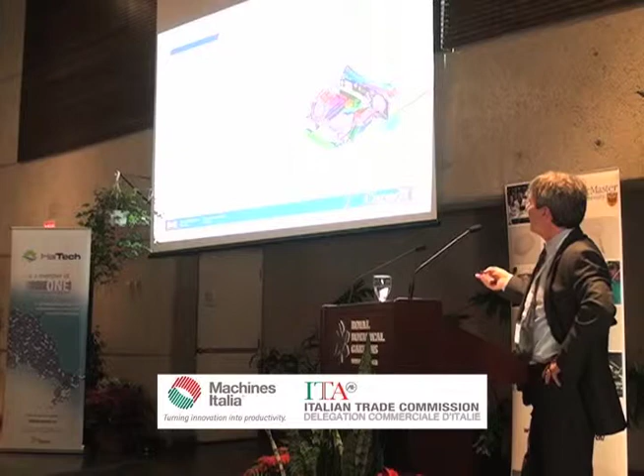Okay, so some of the trends. Fuel economy, something that surprises people a great deal - this is data from North America. Over a 20-year span, fuel economy barely changed. We had the oil problems earlier, but it really didn't change. The transportation sector, however, accounts for 36% of energy use, 24% of GHG. Huge numbers, that's just transportation. And a majority from petroleum fuels.

Another thing, vehicle weight actually over that 20-year period increased by 10%. Why did it increase by 10%? It's because we want cars that accelerate faster. We want cars that have more space. We want cars that are more technologically enabled, infotainment, etc. So in the fallback of this up to 2010, this is fairly stable. We're working diligently to lightweight a car, and everybody is familiar with that. The challenge, all it means now, is that the challenge moving ahead is even greater because we still have to get the car lighter eventually.

Another thing is what are we up against? The CAFE regulation, and the equivalent for Canada, is just in terms of GHGs, but we have to hit a 54.5 mile per gallon target. And how do we get there? We have to get there through lightweighting materials, powertrain efficiency. There's a number of different ways to do that, but materials is one of them.

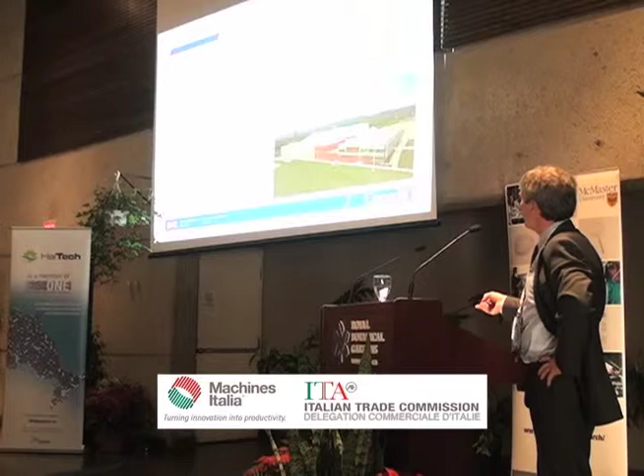We have to make powertrains last, be able to survive higher pressures, higher temperatures, and to do that kind of thing, you could look in the direction of ceramics, as we learned earlier today, but you can also look at opportunities with metals, and that's what we do most at CanmetMATERIALS.

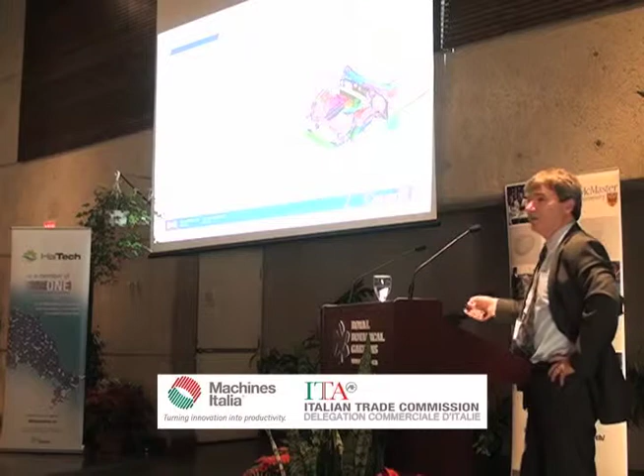The third way to look at this is that 70% of the energy from fuel, when you burn it, goes right out through the radiator and out the exhaust. So 70% of the energy is lost. There's a great opportunity to both recover and convert that energy in one way or another. I'm going to talk a little bit about an opportunity for that, for instance.

Okay, so what are we trying to do? We're trying to make industry competitive. We want to get the environmental benefits while we're doing it.

The problem is that whenever we try to lightweight, we have to do that without affecting vehicle safety. We still have to pass crash tests and we still want people to know that they're safe. A lot of the things we work on improve safety by actually reducing the intrusion distance in a crash, so it doesn't get near you under the same circumstances as the vehicle before. There's a few other important things here.

Reliance on fossil fuels - if we're using less, we're better off. Reduce GHGs, everybody knows that, it's everywhere. Clean and renewable energy - we're working on materials that enable you to get electric vehicles working, which means you can get clean electricity.

Key technical challenges: really manufacturing, strength of materials, durability of materials, and getting materials to do more things within the vehicle, not just the traditional materials.

Who are we working with? Basically raw material suppliers, the supply chain, vehicle assemblers. What are they looking for? Performance knowledge - they need that simply to reduce the risks associated with introducing new materials. You have to understand how new and novel materials behave so you can integrate them into your products. One of the things we don't do is make products. What we do is hopefully enable the parts suppliers and assembly people to be able to make the products and vehicles we talked about today.

Who do we work with? One of the mechanisms we identified earlier was that there are some key universities we have collaborative research agreements with. McMaster was the first university for us to join, and because of that long-standing relationship we entered into that agreement, and with the transition to the Hamilton area, it made sense for us to work together.

Here's 7 projects. Again, we're 100 people with a small investment in a lab that's very focused on metals research. What we realized is that without collaboration, we weren't going to achieve the things we wanted to achieve. So Automotive Partnership Canada, one of the funding organizations, $145 million spent. There's 7 projects we're involved in, and it's very diverse.

There's magnesium here, aluminum and high-strength steels here, aluminum casting with McMaster - Sumanth Shankar is one of the partners here. These are looking at extruded front rails, aluminum alloys, and this is a project on lithium iron phosphate - we heard from Gianluigi earlier that there are battery materials they're looking at. This is a material that goes into the electrodes of lithium-ion cells, and so we're involved in that.

The reason we're involved in all these projects is that we have some expertise, either researchers or equipment that can be used very effectively, which they don't have, so we're an integral part in delivering that. We're a small group of 100 people - 75 technical, 37 PhDs - working with a broad base of universities and people to enable them to achieve what they want to do.

So now into a bit more detail of what we do. We saw three things that were important: vehicle lightweighting - by 2025, and I was involved in 2011 in a workshop put on by the US DOE. They had 350 people from industry, academia, and federal labs in both Canada and the United States, with probably a few international participants as well. Some of the things they recognized is that to achieve the fuel economy goals, these are the kinds of targets we'll have to take.

Take the body structure and reduce the weight by 50% by 2025. We don't have a lot of time to do that, and if you think about how we even integrate these technologies into vehicles when models only change every so many years, it's very hard to get these kinds of targets. But this is what they felt was a stretch goal - possible, but also necessary to get to where we wanted to go.

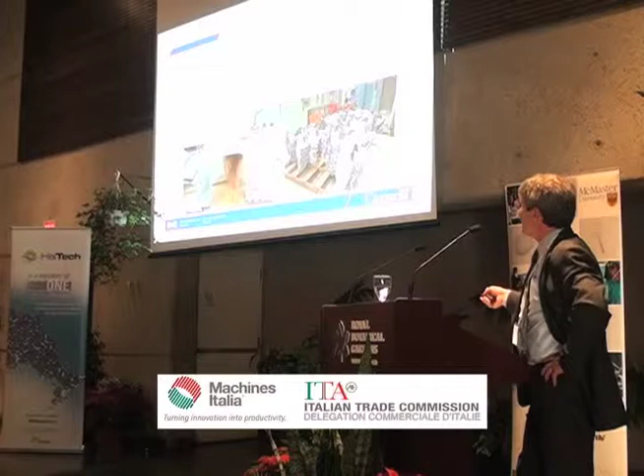Some of the stuff we're working on: we're casting in a high-pressure die caster a magnesium alloy, AM50 or AM60. This magnesium structure sits right beside the wheel, and it holds the rails, the crush rails. When you get into a crash, the crush rails are held by this structure, and the wheel sits right beside it, and the shock absorber, which allows your car to go up and down, sits right in here.

One of the things that we have is a 1,200-ton press. I'm not spending a lot of time on all the facilities because it's best to just come and see them, but we have a 1,200-ton high-pressure die casting press that allows us to make these kinds of parts.

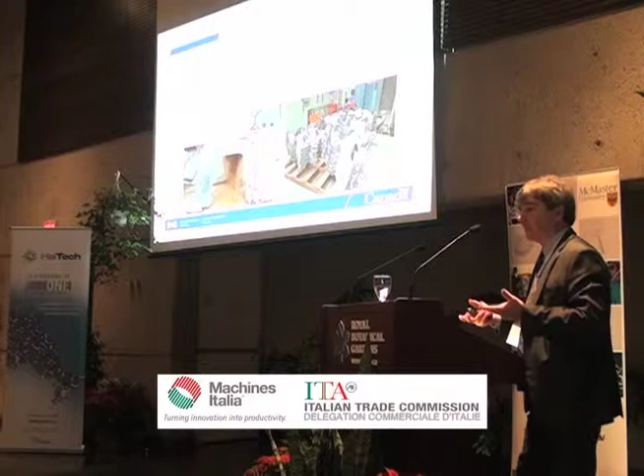We made 400 parts in a single run that fed a three-country collaboration between the United States, Canada, and China, because they have great interest in magnesium, since they make most of the magnesium globally. So we have a three-country collaboration where each country takes the parts we've manufactured on our press and uses them for their studies. One might be doing strength, one durability, one corrosion, etc. That type of collaboration allows us to pull a team together.

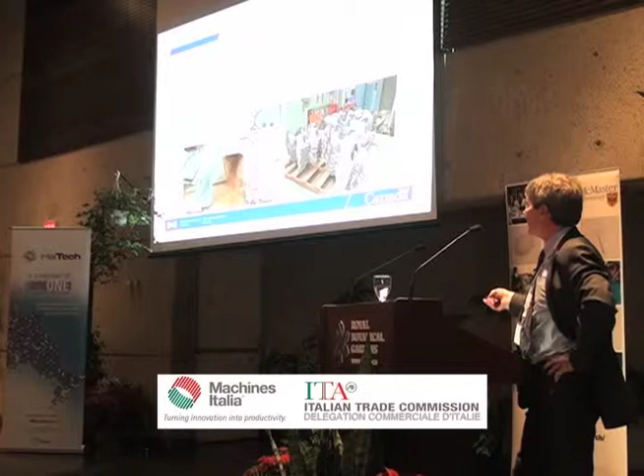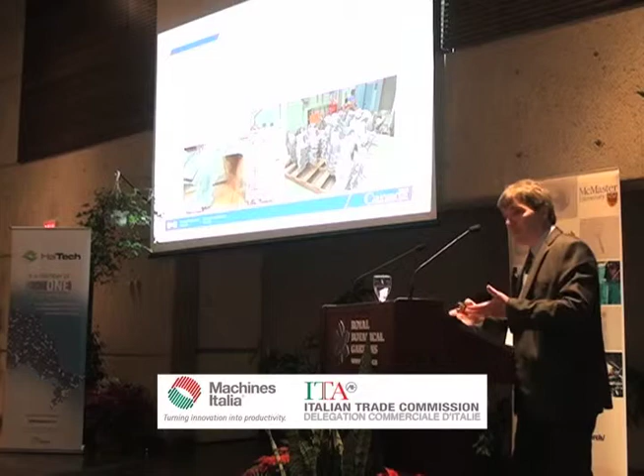This is about a $3 to $4 million a year activity. Our investment is about $200,000 to generate the kind of parts that go into it. It's very important to have the parts for this kind of activity, so putting that amount of investment into the equipment we have is critical to the success of that kind of research.

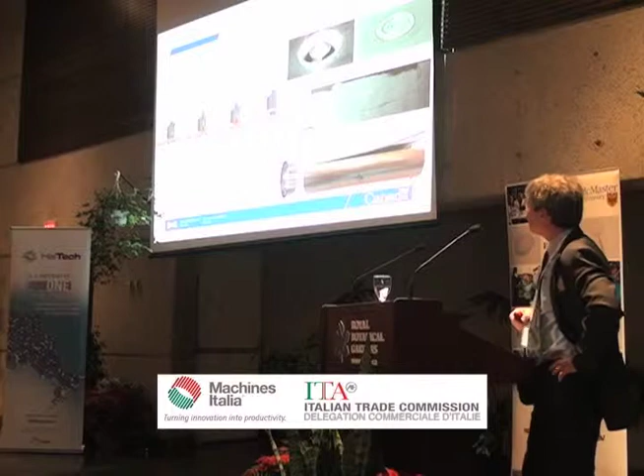Carrying on with lightweighting, I mentioned the multi-material vehicle. Structures traditionally have been made out of steel—mild steels, high-strength low-alloy steels. There's increasing pressure to make vehicles out of mild steels, high-strength steels, but also advanced high-strength steels, extremely high-strength steels. These steels put on the same vehicle pose a challenge in that you have to be able to join these high-strength steels to steel.

There are other opportunities, like the magnesium part I showed you, which is also made in aluminum—we actually have that part in production in vehicles out of aluminum. The problem that comes up is how do I join them? If I had to join aluminum or magnesium, a casting to a sheet metal of different materials, sometimes it's within the alloy itself—aluminum alloy to another aluminum alloy—and I can't actually weld them using traditional methods.

There's a method we're looking at called friction stir spot welding. We're very interested in it because the method basically takes two pieces of metal, overlaps them together. In a traditional sense, we would see spot welders used.

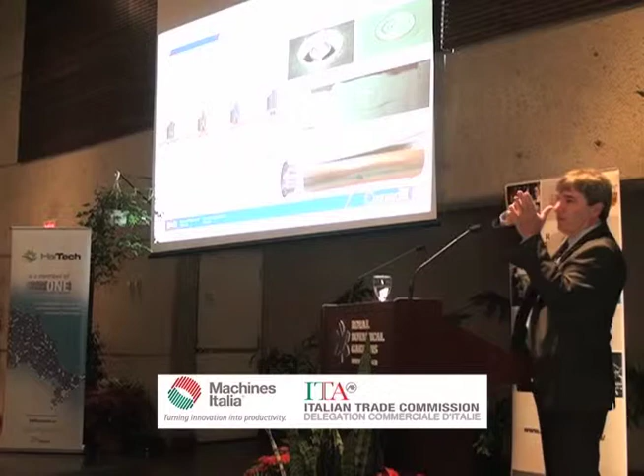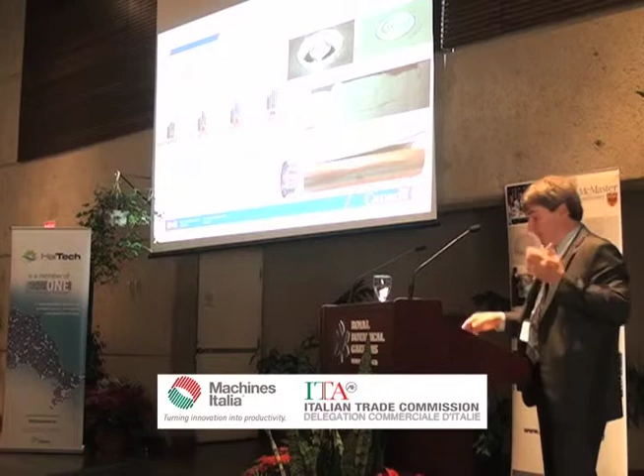In automotive assembly, we see spot welders—it's always exciting because it spits out metal, it's hot, and it's interesting seeing a car actually being made in an assembly line. The idea here is that you can take the robots and infrastructure you already have; you don't have to buy new equipment. You use that equipment, put a new head on, and take a tool much like a drill bit, drive it into the metal, but you don't melt it. If you don't melt that metal, you can create a joint.

This is a special approach, because if I took a traditional friction stir spot welder, I would be left with a drill hole, since a drill went in there and mixed those two metals together. What they do instead is drill, then the metal pushes back up on the edges, and they drive that metal back in to get a flat surface.

A sample or joint with a big hole in it is likely going to be much weaker and likely to fall apart by fatigue during the service life of the vehicle. So we're studying how to join things like aluminum to steel, high-strength steel, magnesium to aluminum, aluminum sheet metal to aluminum castings, those kinds of things. This is a cross-section of what that joint looks like—normally you'd see a large hole right here because of the drill bit itself.

So we're studying that. This is a collaboration we have with Magna Corporation, and the University of Waterloo has one of these heads, which allows us to do some studying. In terms of lightweighting, everybody realizes you can apply aluminum and magnesium alloys to lightweighting, but we're also focusing a great deal on advanced high-strength steels.

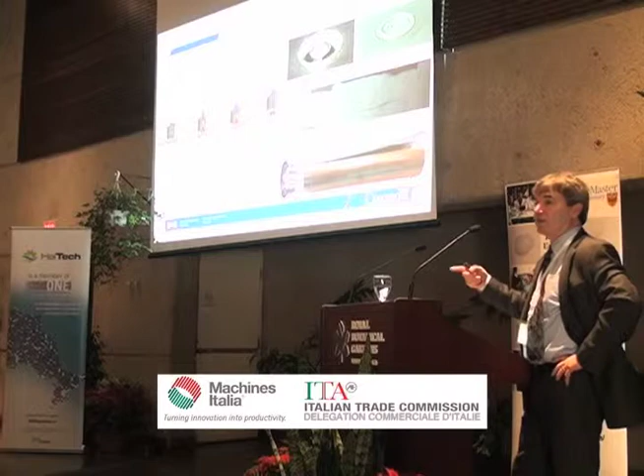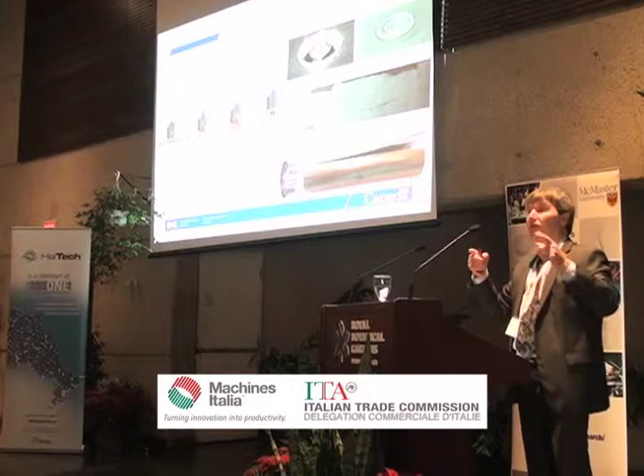So very high-strength steels. One of the things that goes with high-strength steels is that if I take a part like a frame, a B-pillar or an A-pillar, that's what protects your head in a vehicle. A traditional manufacturing method would take a tube and hydroform it into a shape, which protects you in rollover or crash situations. What we're doing here is looking at high-strength steel and expanding it out in a hydroforming press.

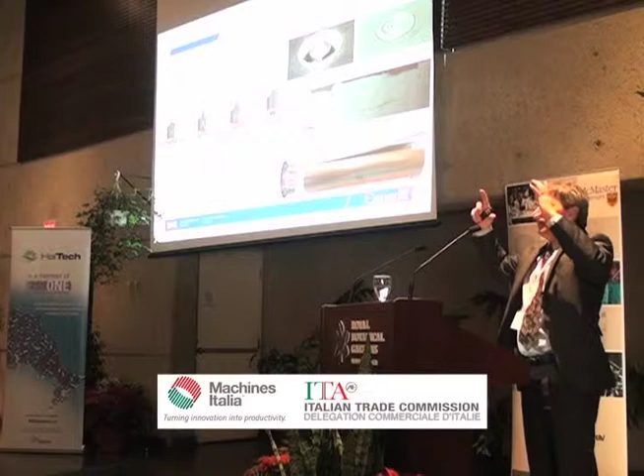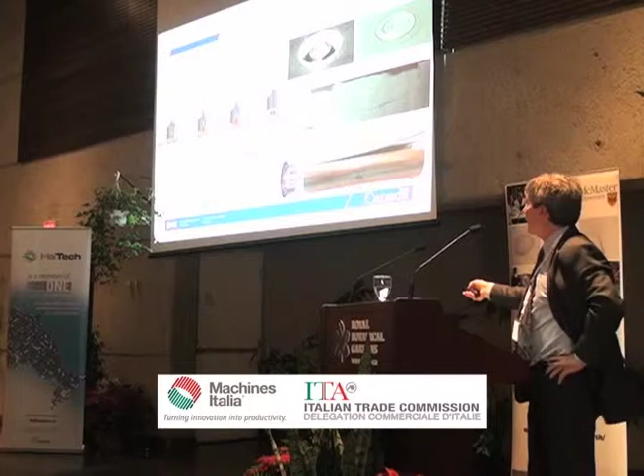Then when you relieve the pressure, it shrinks back, and predicting the shape of that part gets extremely difficult. So we're working right now with Vari-Form, a hydroforming company that makes those kinds of parts, and we're looking at the springback of these steel tubes that get bent into shapes that protect us in a car.

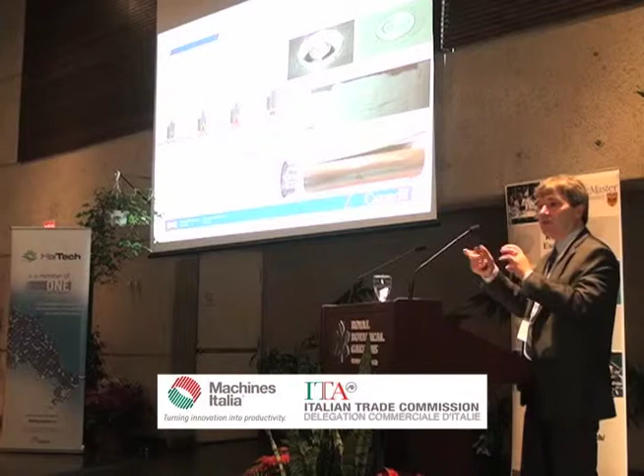What we realized early is there are problems with making a tube out of flat sheet and rolling it up - you get residual stress. That residual stress makes it extremely hard to predict what happens when you hydroform. So we're doing experiments, but also computation, to predict how to get the right shape at the end. And that's important.

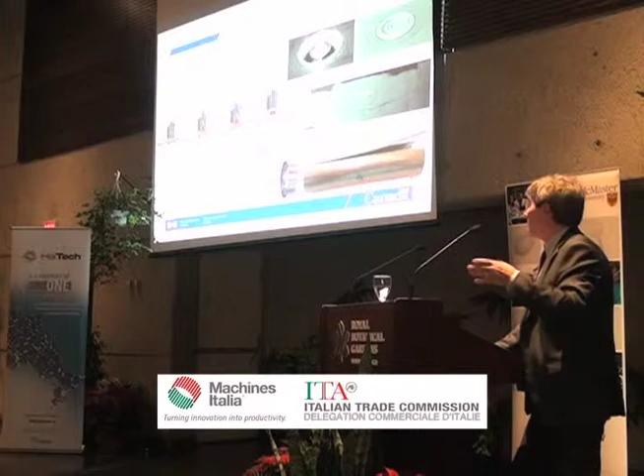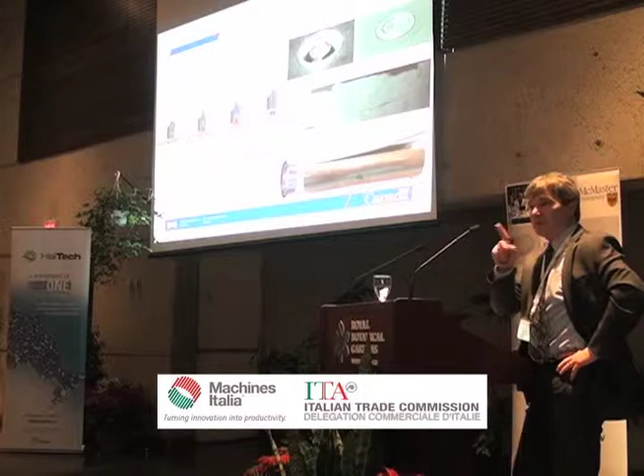A major thing that causes a part not to get deployed into production is the cost of the tooling to develop it - not only production tooling, but prototype tooling. If we can get a good idea of how springback behaves, we can cut that back significantly, to the point where we might have one tool that hits the shape and then go right into a production scenario. That's an important contribution.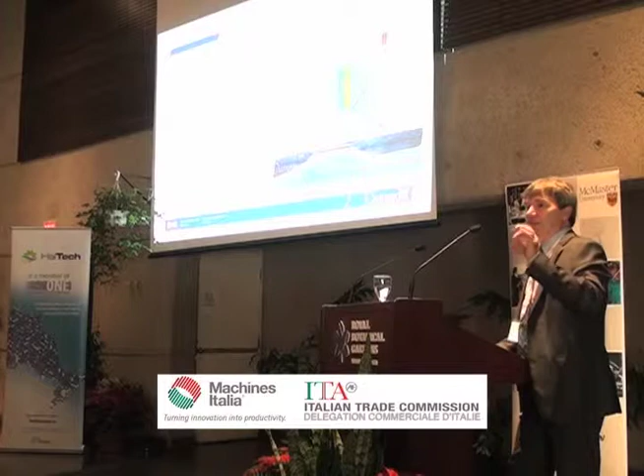What GM found and patented was a method for that spot welding. The problem wasn't that they couldn't get the process to work - they got the patent on the process. The problem was they didn't know how strong the joint was in the spot weld, so they couldn't predict exactly how it was going to behave when designing a vehicle that might compete with, say, the Ford F-150. The Ford F-150 truck is now an all-aluminum vehicle, and GM is looking at the opportunity to do that and deploy it in other vehicles as well.

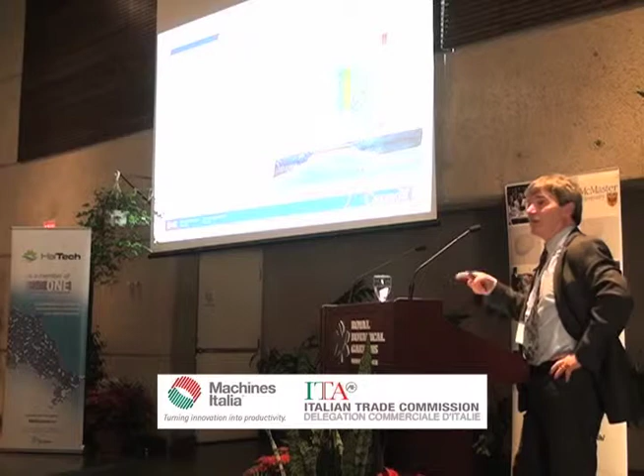The point here is that Canmet developed a testing technique, now an ASTM standard, that allows you to predict the actual behavior of that nugget. Being able to do that allows GM to design that next vehicle much more reliably. The interesting thing is, each time they pull, they try different combinations of metals, and we can tell exactly how they're going to behave.

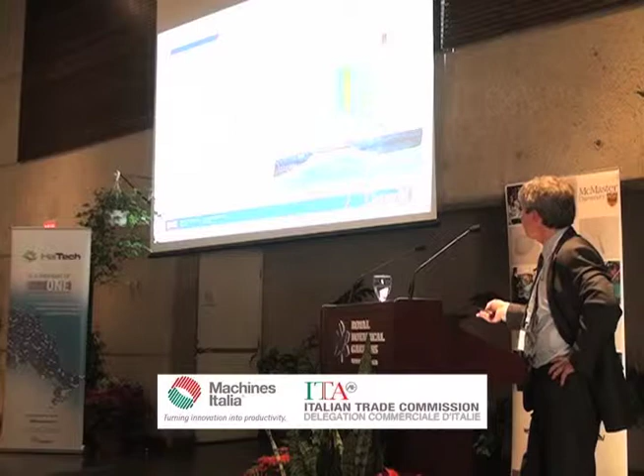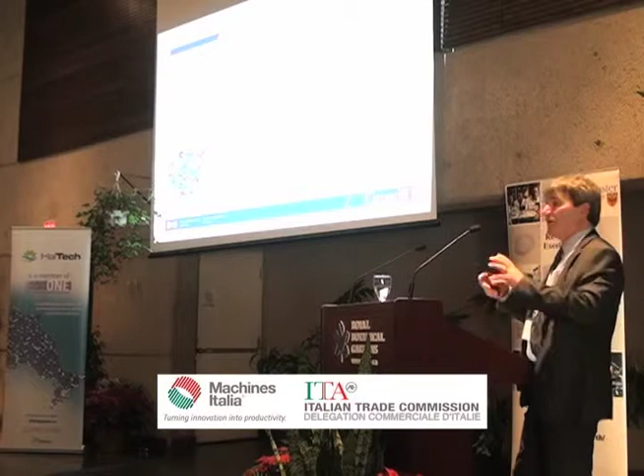Something we also do is computational work. This one was looking at third generation steel, trying to find something extremely strong and tough - ductile and strong makes a very tough material. We know through our work with the U.S. Department of Energy that they have a massive initiative, spending tens of millions of dollars on this kind of activity.

But we found out through close discussions with them that they had a gap in one area - computationally they weren't addressing what they needed to do computational materials engineering, literally to design those steels. Making every steel at Canmet isn't the most cost-effective way of doing it, so using computational means is a way to do this.

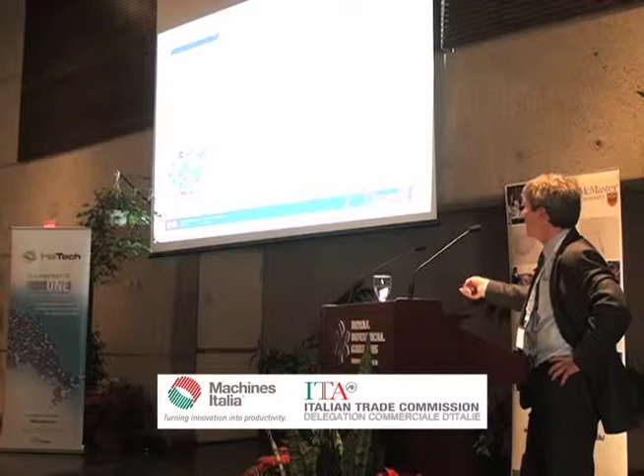So, virtual microstructure - we've seen a number of cases. Gianluigi showed us some stuff on the grain structure in materials. So we've got a typical microstructure here. They're taking the microstructure and developing codes that allow us to do yield curves, how a material plastically deforms, and looking at forming limit curves, all through computation.

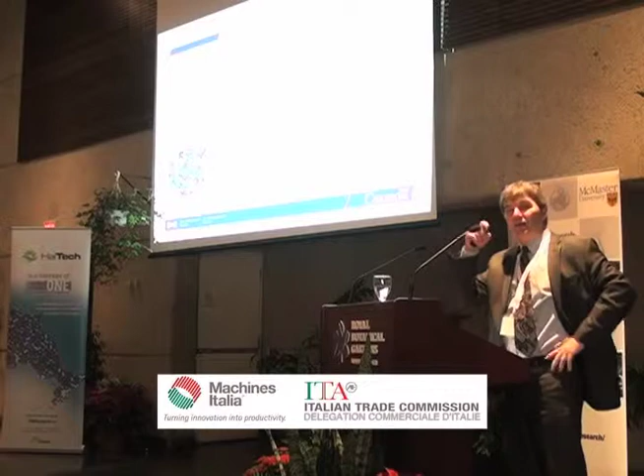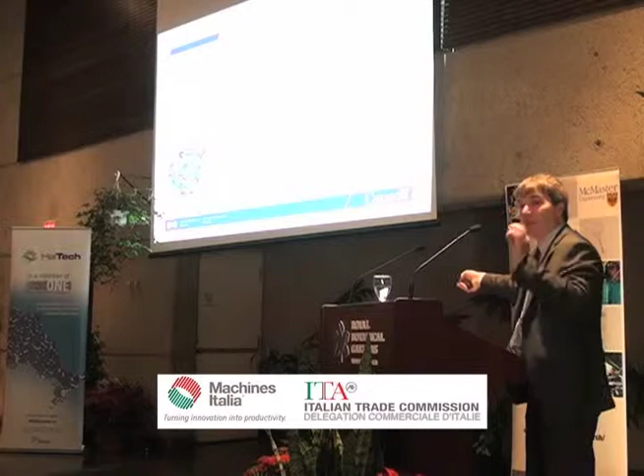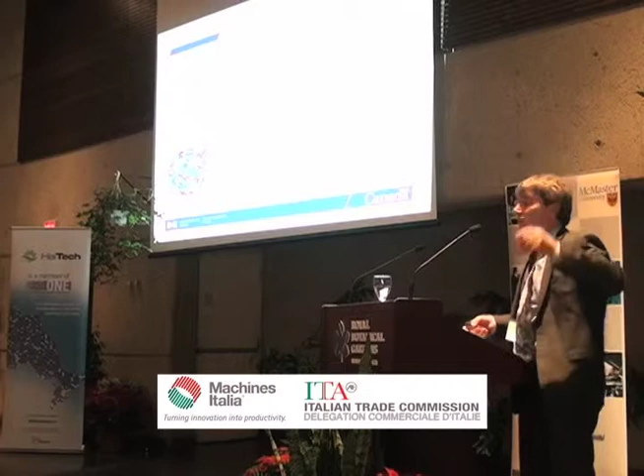If you take chemistry and look at the grain structure that's created, get Gianluigi to tell us exactly what that grain structure is. If we ever have to make an alloy, we can computationally do 10 different versions before we make a single cast, predict how it's going to behave and how it's going to form, and tell whether it can serve our needs to form a large panel for the front of your vehicle, for instance. So computational means is another area.

On the powertrain, because I did focus a lot on lightweighting, there's things like manifolds. If we wanted to run more efficiently, we have to handle higher temperatures, higher pressures, and to do that you have to get manifolds that can actually handle that. In collaboration with McMaster, with Stephen Veldhuis, we created an alloy that we felt was going to be more effective in terms of balancing the high temperature strength with the machinability and the manufacturability. You have to do those things, otherwise you can't get to where you want to be.

The H-bars here are set up so that we do machining studies, and then we take the cast parts, cut samples out, and look at the oxidation and the high temperature behavior of them. So we're developing those. Why do we need that?

By 2025, exhaust temperatures are going to rise by 80 degrees. Look at the temperatures here. Earlier we heard 1,000 degrees, 600 degrees, those kinds of numbers - that's what we have to deal with. Block temperatures, so our aluminum blocks, our aluminum engines have to survive temperatures greater than 200, 250 is the target. Pressures are going up. If we try and get these materials into diesel applications, diesel even runs higher pressures. So these are the kinds of challenges that we have to do.

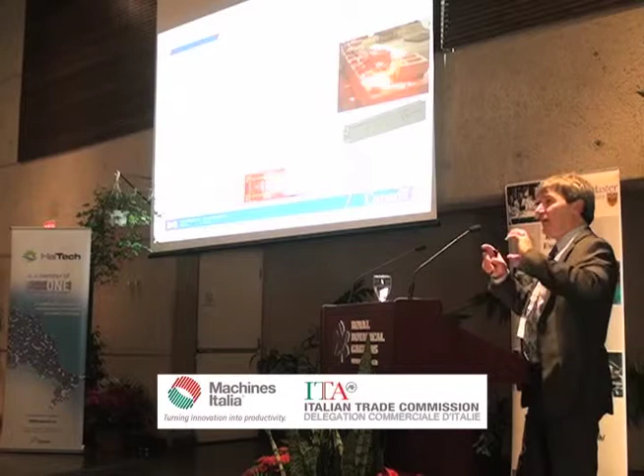Another approach on the powertrain is to do electrical steels. Not every vehicle in the future is going to be made from a traditional internal combustion engine. In fact, if we could switch it over to electrical vehicles, we'd be advancing a lot faster on the GHG front. But one of the things we're working on right now is a way of rolling materials so that you can make motors and get the right texture, or the right crystal structure and orientation, so that you get very effective electromagnetic behavior in the electric motor. So we're working on those materials to enhance our ability to get to efficient powertrains.

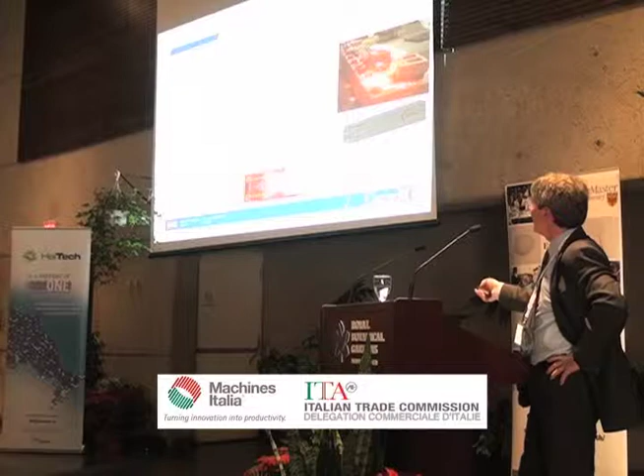The last example I have here - 70% of the heat gets lost in combustion from a vehicle. As I raise temperature, it gets worse. I still have to deal with the heat. We're going to see a lot more turbocharging as we move forward, and that poses some problems in terms of dealing with higher temperatures as well, and of course batteries. So there's lots of aspects around heat and energy management that we have to deal with in terms of those materials.

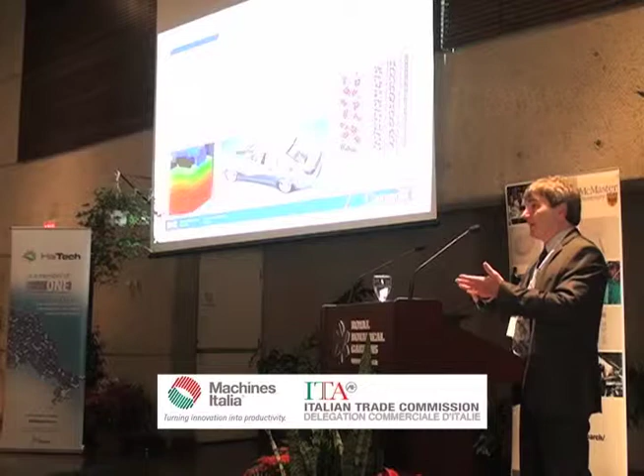One example is thermoelectrics. At Canmet right now, they're collaborating with the US DOE and at least one of the national labs in the US through the International Energy Agency, with a few different universities - Toronto, Waterloo, McMaster. All of that group is now coming together to develop a material that takes heat and converts it to electricity, so we can charge a battery. That's an example of exhaust heat recovery. We're doing it right from the atom structure, and Gianluigi gave us a good idea of looking at atoms. These guys are doing calculations and trying to figure out exactly what the material needs to be so that we can understand more about how it behaves in a thermoelectric generator.

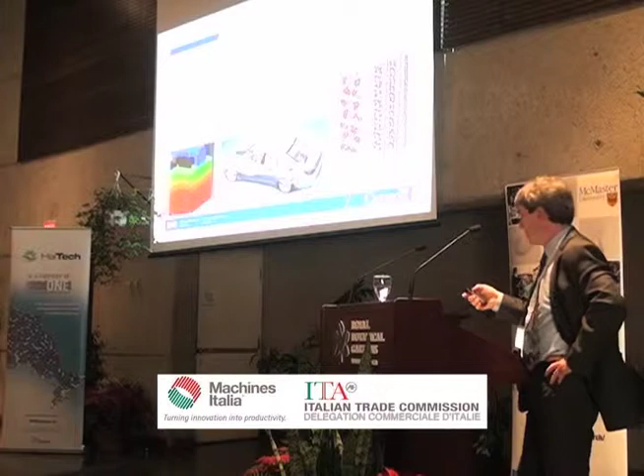And then we have companies - the company I work for, Dana, who is a heat exchanger manufacturer, really focusing on recovering that heat through a heat exchanger and converting it to electricity. So another contribution. Every one of the projects is a massive leveraging and collaboration with universities with expertise around Canada, and to some extent around the world, to be able to understand what we should be working on and how we're doing it. So we're doing good things with materials, and it's through that collaboration that we're achieving the kinds of things that we need to achieve to reach the goals. That's it.